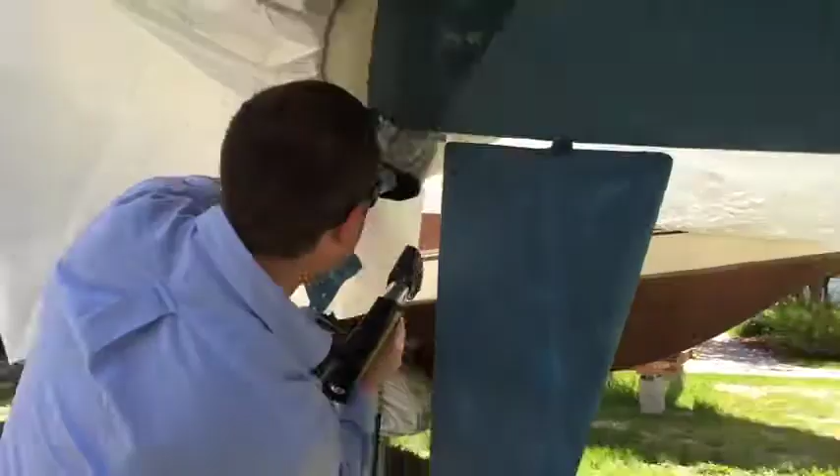Today, Dr. Shrink will be demonstrating how to successfully wrap a sailboat, mast up, for the winter storage season. The techniques used here can be applied when wrapping any single-masted sailboat. We will begin with the strapping.

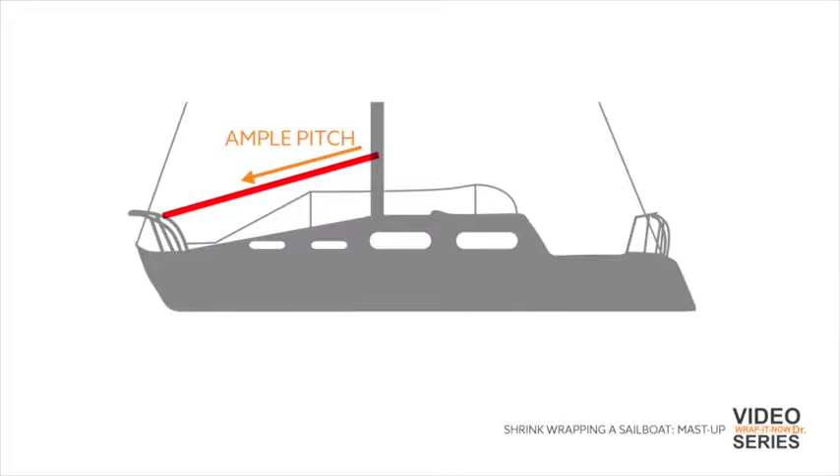The strapping will be secured to various locations on the sailboat to ensure proper pitch to shed unwanted snow during the winter storage season. Begin by securing the strapping to the mast and the forward pulpit. We will start with the mast. When securing the strapping to the mast, ensure it is high enough to allow ample pitch to shed snow and ice. Tie your strap to the mast, leaving plenty of extra to secure to the forward pulpit strap.

To secure the forward pulpit strap, we recommend making a V pattern with your strapping, securing to the strap on both port and starboard sides of the rail. Your strapping from the mast and strapping from the pulpit will be connected using a buckle and strap tensioning tool.

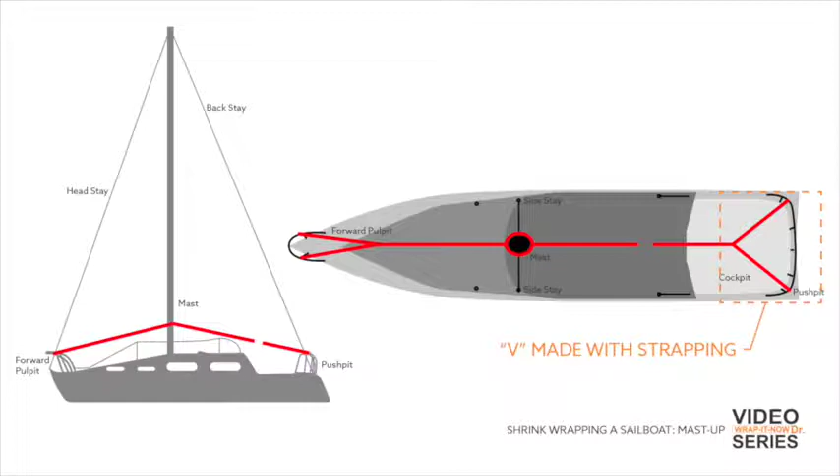The same concept applies to the strapping system for the pushpit rails. Secure a strap from the same location on the mast as you did to the forward section of the vessel, again leaving yourself plenty of strapping to connect to the pushpit strap. For the pushpit strapping, create a V pattern from the wide points on the starboard and port side of the pushpit rails and secure both straps together once again using a buckle and strap tensioning tool.

Here you will see the strap being tightened with a strap tensioning tool. Just like the forward bow straps, knot off the excess strap and cut away any excess. At this time, you will also want to tape your buckles to ensure no hot spots or holes are created in your finished shrink wrap cover.

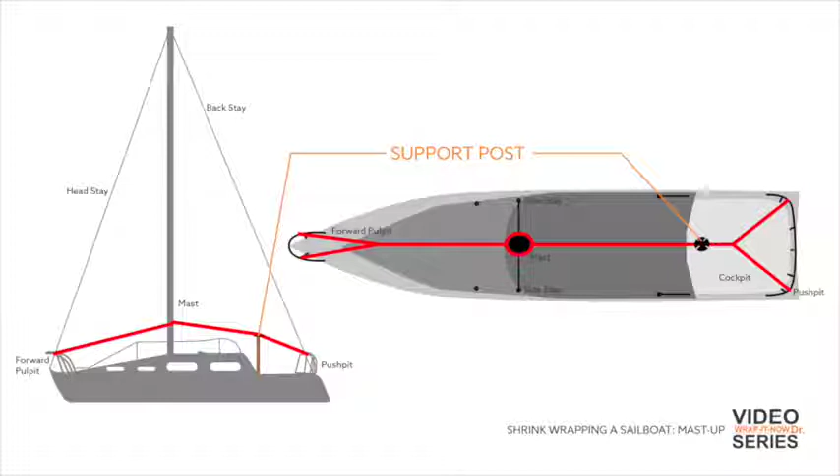For this application, we will also be installing a support post with end caps in the cockpit of the vessel for increased strapping stability. Measure your post like we have done here, and cut your 2x4 to size, and secure end caps to each end.

To ensure that your end cap is secure, run a line perpendicular from your existing strapping through the end cap around the hull of your vessel. Be sure to place your support post in the cockpit, so when wrapped around the hull, the strapping sits behind the keel. Once this is completed, you will secure your strapping with a buckle and strap tensioning tool. Be sure to once again tape your buckle.

We will now move on to the perimeter band. To install a perimeter band, we will install straps from the cleats or rails with an open loop on the end. As you can see here, the loops will secure the perimeter band just above the waterline of the vessel. You may secure your perimeter band as high or as low as you like, but if unsure, use the waterline as a guide, as this will ensure an even perimeter band around the entire vessel.

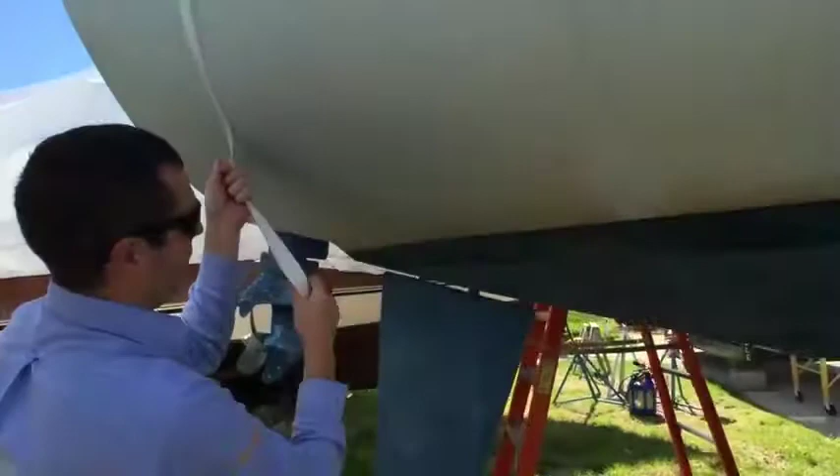Much like the installation of the perimeter band on other vessels, start at the rear and loop your band through each of the straps around the entire perimeter of your boat, ending at the stern. Here you will use a buckle and a strap tensioning tool to secure your perimeter band.

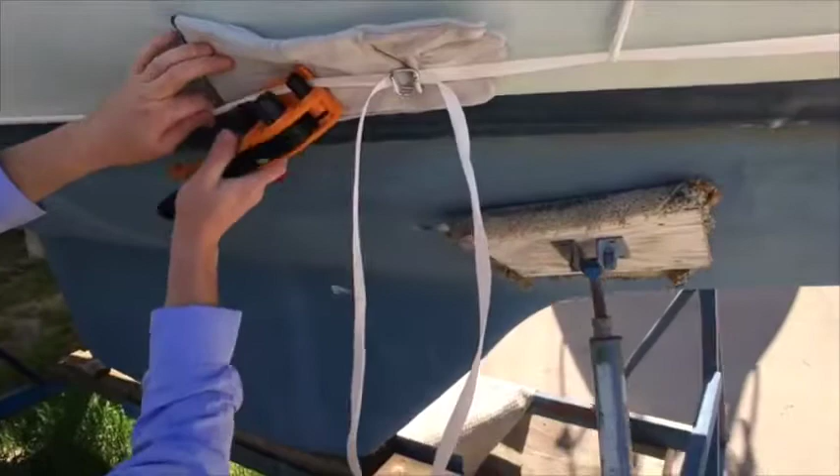Be sure to use padding or protection against your hull when using the strap tensioning tool. Apply even tension to the strap to ensure that it is a snug fit against the hull. When you have tension in the strap, be sure to cut your excess strapping, tie off, and tape your buckle. Now that your perimeter band is complete, your shrink wrap substructure is now finished.

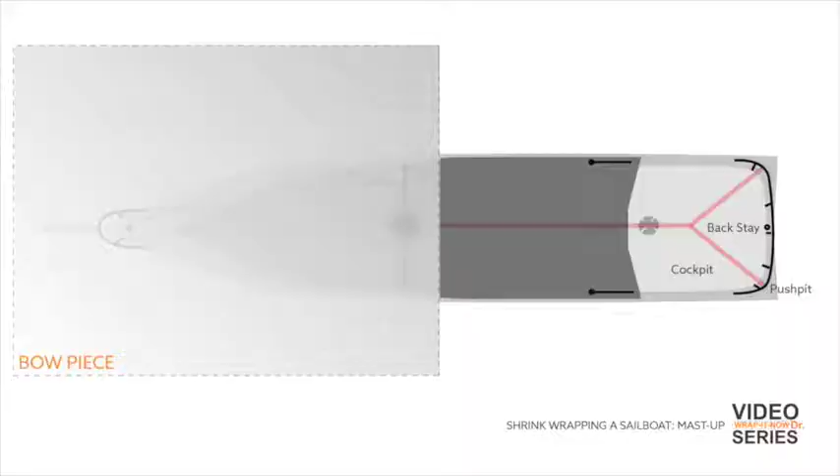We will now measure for your shrink wrap cover. We will have 2 sheets of film, one for the bow section to the mast, and one from the mast back to the stern. Here is how we will measure these sections.

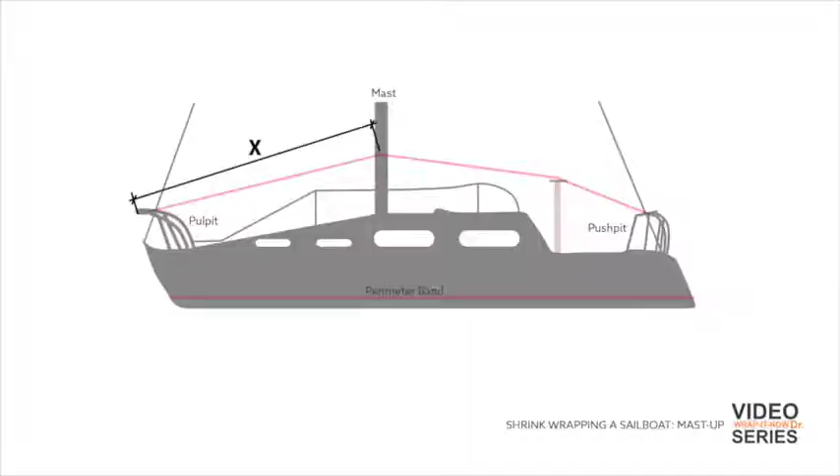For the bow section, we will first measure the length. We do this by measuring from the mast to the forward pulpit and down the bow to the perimeter band. We will add an additional 4 feet to this, 2 at the mast and 2 at the perimeter band, for additional film needed for our welds. This gives us our overall length.

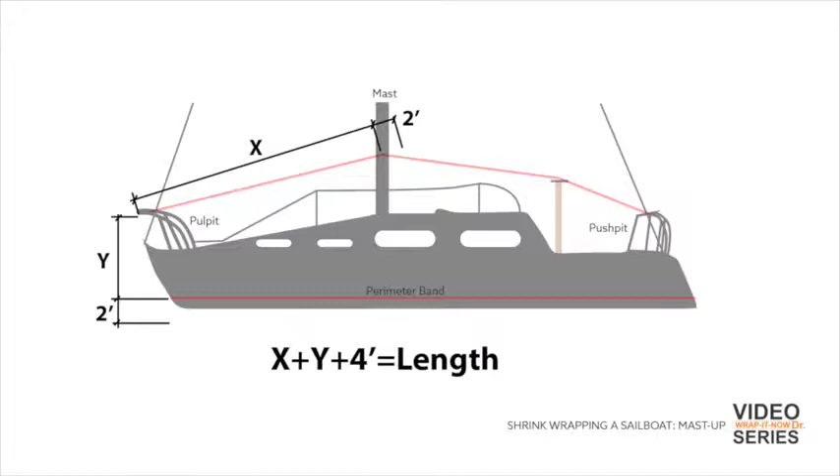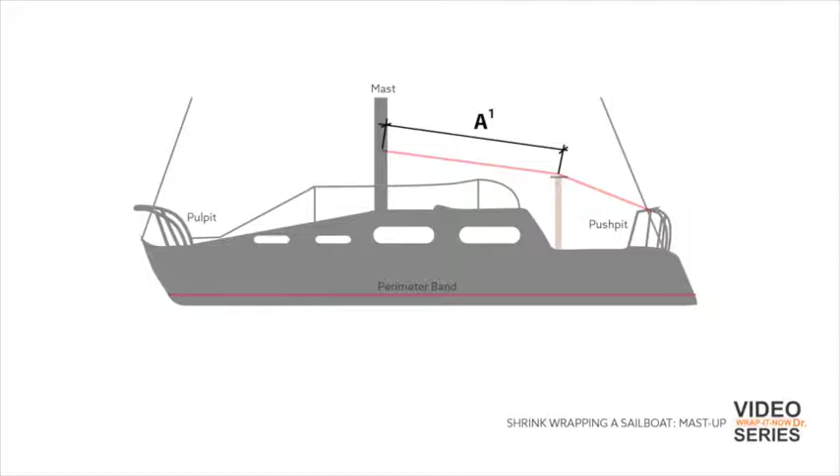We repeat this same concept for the stern film piece. For the length, we measure from the mast over the end cap to the pushpit rail. From here, we will measure down to the perimeter band and add 4 feet, 2 at the mast and 2 at the perimeter band, for additional film needed for our welds. This gives us our overall length.

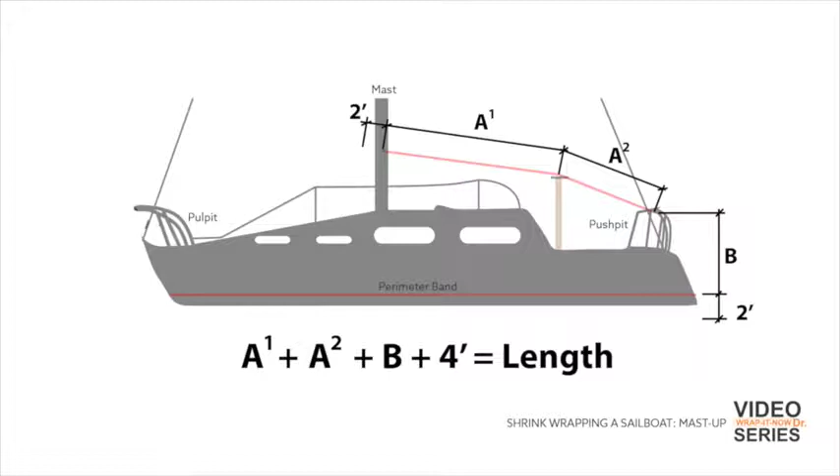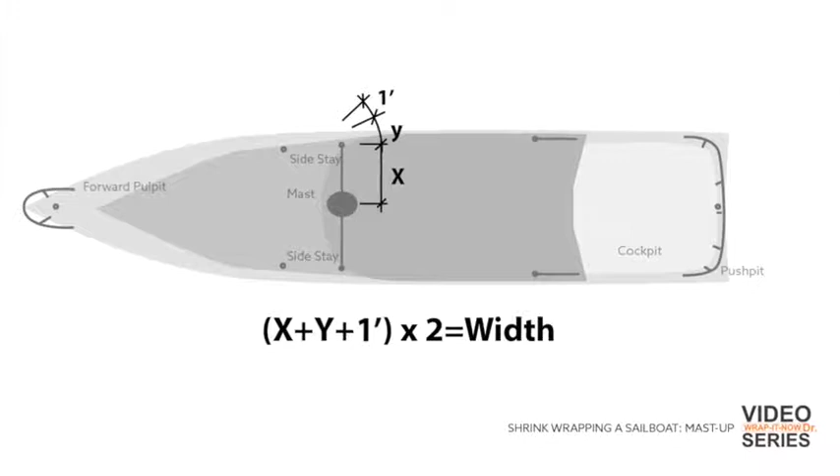We now need to measure for the width. We do this by measuring from the connection point of the strapping on the mast to the top of the lifeline down to the perimeter band. We then add 1 foot to this measurement to ensure we have enough material for our weld. We double this for our overall width.

Now that we have the measurements of your film, we will cut the film to length. This will make it much easier to install from the elevated position of the vessel. Roll out your film in a clean and dry area to avoid debris on your film. Measure and cut with a film knife.

Once your 2 pieces have been cut, we will begin installing the film. We will begin by installing the bow piece. Unwrap your film from the deck of the vessel and find its center point. You will secure the film to the mast with tape. Be sure to leave about 2 feet of excess beyond the mast, which you will use for your weld piece to the stern.

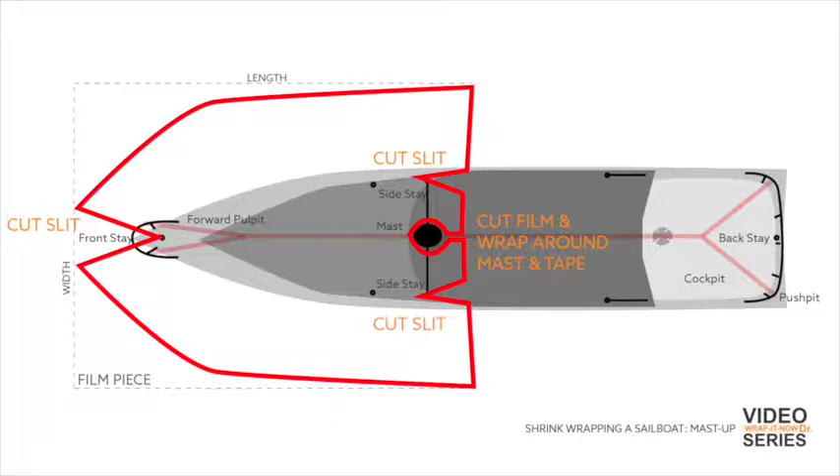As you drape the bow, you will cut slits in the film around the front stay, side stays, and mast as illustrated here. You will do this to both port and starboard sides of the film. Once you have cut these slits and fitted the film centered over the bow, unfold the entire bow piece.

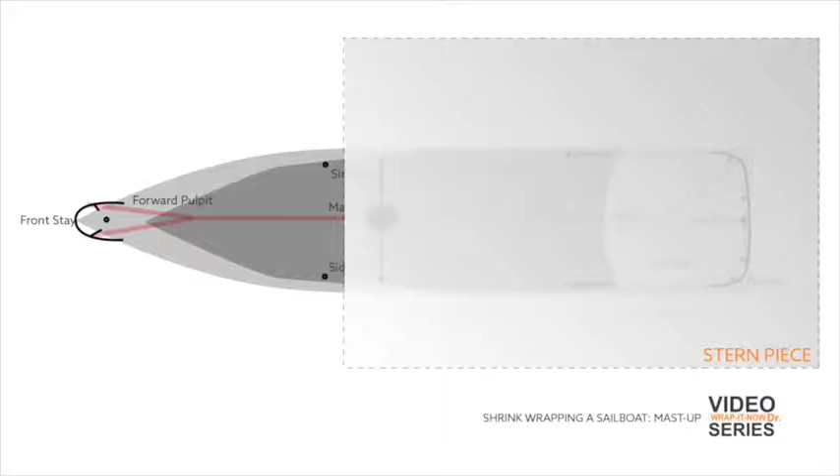You will now install the stern piece. Take your film onto the deck of the vessel and, much like the bow piece, find the center point. You will cut slits in the film around the back stay, side stays, and mast as illustrated here. Be sure to once again leave about 2 feet of excess for your weld to the bow piece.

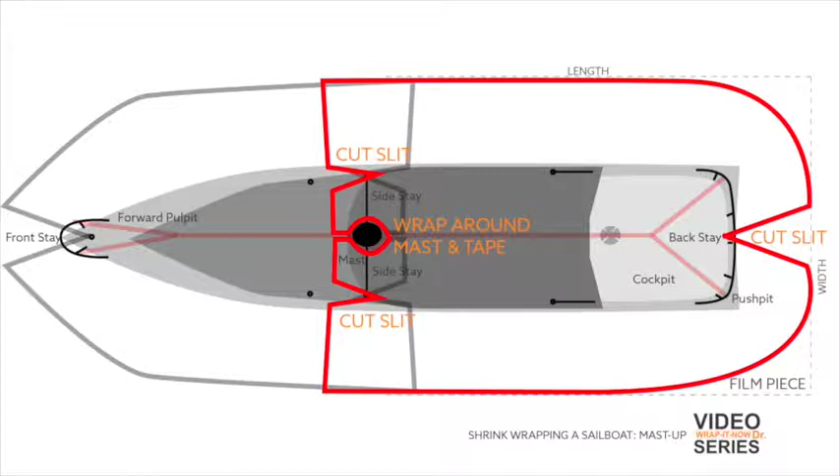Once you have found the center and taped your bow and stern pieces, you must weld the film around the mast, between the mast and the side stays, on both port and starboard sides of the boat, as this area will not be accessible once the entire vessel has been draped. You can see in this diagram the area to be welded before getting off deck.

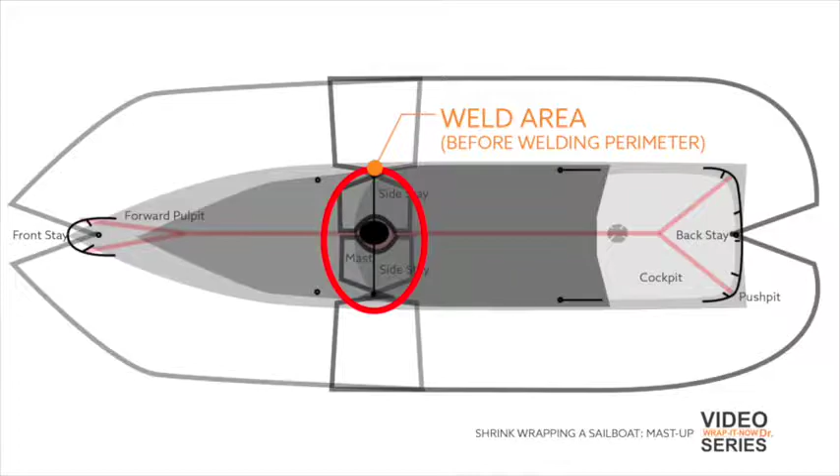Now that you have the entire vessel draped, you will tuck the film under the perimeter band to create your weld and also cut any excess film to conform with the lines of the vessel. Remember, you will need approximately 1 foot of film to tuck around the perimeter band for a secure weld that will last the entire storage season.

You will notice the entire perimeter has been tucked with the exception of the bow and stern section behind the transom. This will be overlapped and welded, much like the center weld. Cut away any excess film, giving yourself approximately 1 to 2 feet of film to join together and weld in these areas.

Once all of your bow and stern sections have been welded, you may weld your film around the perimeter band. As you make your way around the boat, you may also weld the center section, joining the bow and stern film pieces. Now that your welds have been completed, we will install belly bands to ensure your cover stays in place during the shrinking process. For this application, we've installed 2 bands, one on the bow side of the keel and one towards the stern.